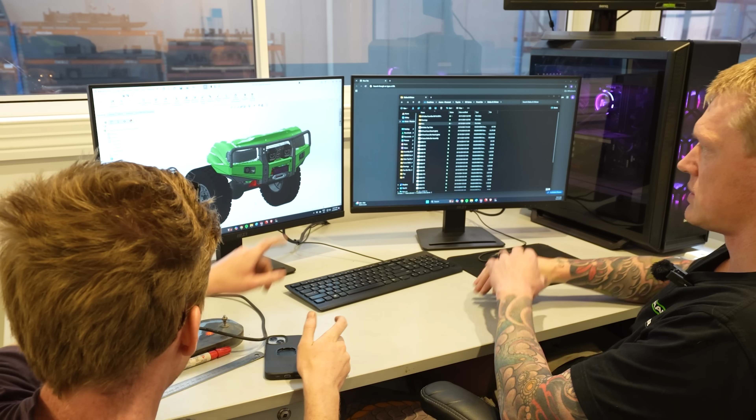The problem we face is currently the bull bar I want doesn't exist for this car, so we're gonna have to research, design, and build a bull bar from scratch. In order to make that happen, we've come down to see our mate Rob at Raslarr Engineering. You might remember he helped out with the barwork on Liam's patrol build, and he's gonna help make this a reality.

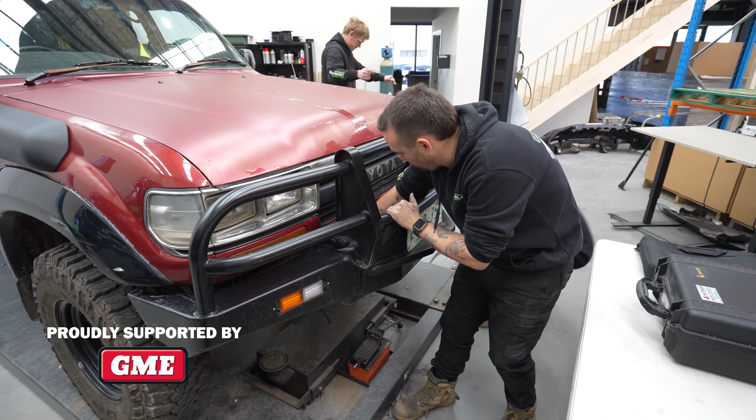Choosing the right barwork for this car was always going to be one of the biggest decisions. After the fresh paint job, it looks like it just rolled off the Toyota production line, but the barwork is where you get to make the 80 series uniquely yours.

I'm down here with Rob now, and we've got the 80 series on the hoist. Rob's been flicking me designs back and forth, and we've landed on something that's a bit more modern style, but also something that would suit a tourer like me, not like Liam where it's full comp style - a bit more tourer spec, a bit more for the older community, I guess you'd say.

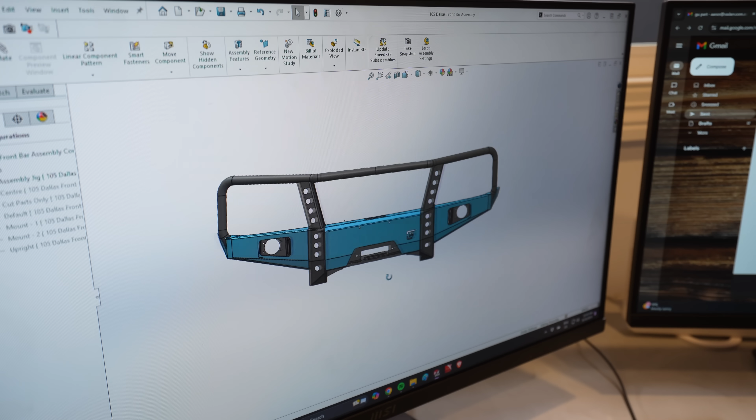More sheet metal, less tube, but still more of a tourer look, but still having hoops for protection, because obviously it's a bull bar first and all - you want it to be able to protect your car on the road against wildlife, other vehicles, the environment. So you sort of want to keep that practicality while giving it the modern look that I'm after.

So with a bull bar, I guess the first thing when it comes to designing, where do you start from - is this like on a piece of paper, literally just drawing down designs, or?

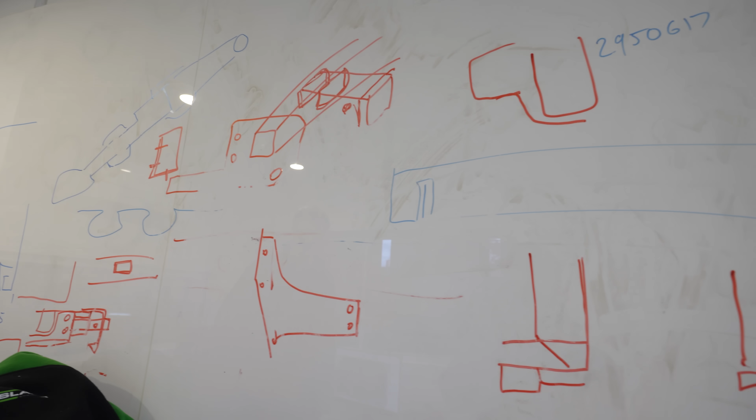Look, it's changed a lot over the last sort of 10, 15 years. Obviously in my early time, it was literally cardboard templates, cut something, try it on, hand drilling it. The world's changed so much in that time.

Now we have Aaron, who's our full-time CAD designer, so we can literally scan a car and come up with even just the actual look of the bar before you've spent days, if not weeks. You might make one and go, I don't like it - now in the computer you can see if you like it.

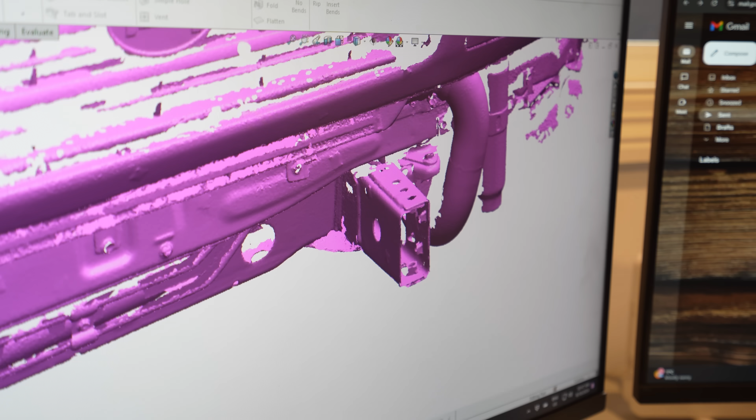Before you've even wasted all that time, you get the actual look down to what you want and suss out mounting and that sort of thing. Then, like we were talking about earlier, you've got to make a prototype and do a small production run, try them on multiple cars and try and learn all the variables.

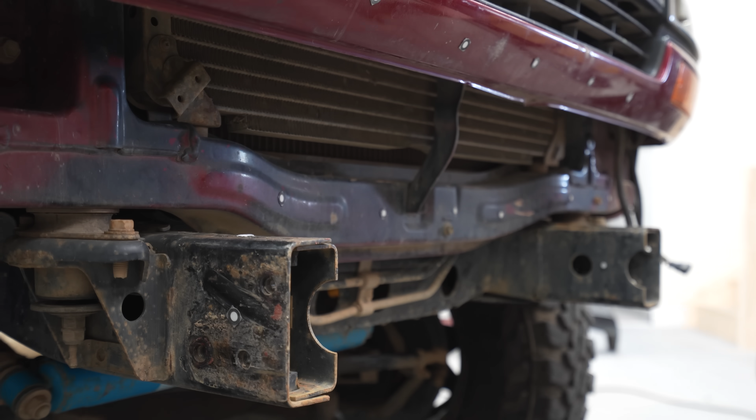Exactly, because these cars were built in Japan in the 90s, but there are tolerances - not every 80 is exactly the same in terms of exact measurements, and that's one thing that over time they haven't got better. It's not uncommon for the width of the rails to be sort of 6-8 mil different in width. Modern cars, like a new Patrol, it's common for the bodies to be 10 mil off to one side.

And I guess that leads into the exciting thing we get to do on my car - actually 3D scan it. That's using that fancy laser gun that's shooting stuff at it, getting reflections back off, and builds a 3D model of the car, which then you guys can put straight to the CAD and build your design off that, get all the measurements right, and then send it out to your boys to actually build.

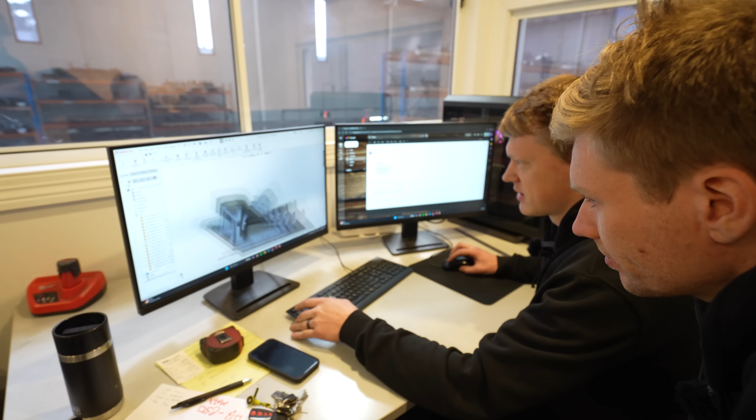I'm here with Aaron now. Aaron, how long have you been working at Raslarr for? Nearly 10 years. He's basically one of the main engineers here that designs all the bull bars, does all the 3D scanning and CAD work. It's really cool - he's the actual one who's designing the bull bar that's going on my car, so it's awesome to have him here to talk us through all the different stuff about it.

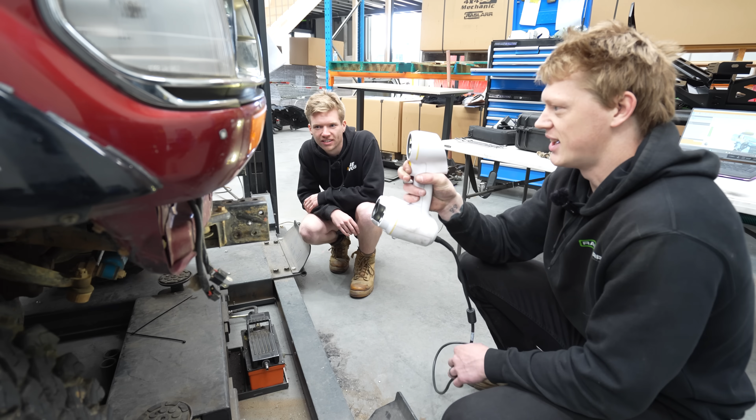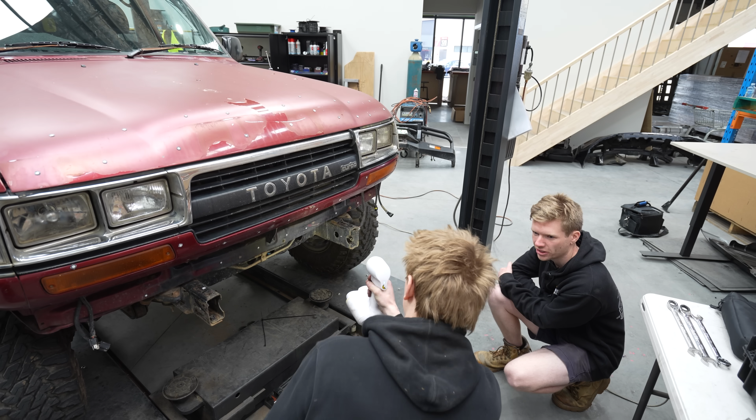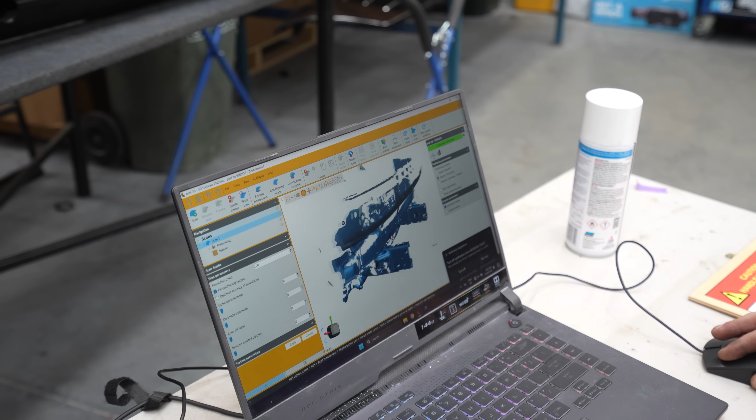So when you started here, did you do 3D scanning, or did you do it the old school way? When I started here, we didn't even have a scanner or anything like that, so everything was pretty much cardboard. This probably allows you to do more complex design work, since you can just stick it on the computer and put in random cuts and shapes. Yeah, 100%, takes all the guesswork out and all the hard labour, let's be honest. So in real time you can see it painting - pretty much, yeah, like discovering all the parts on it.

That is awesome, so you can see your bolt holes and you pretty much build off that. So the scanner hates shiny surfaces like this. Yeah, right, because it reflects light - that's how it works essentially. It's shooting out photons, getting the reflection, and measuring how fast it takes to get back to the camera, and then obviously measuring depth and all that.

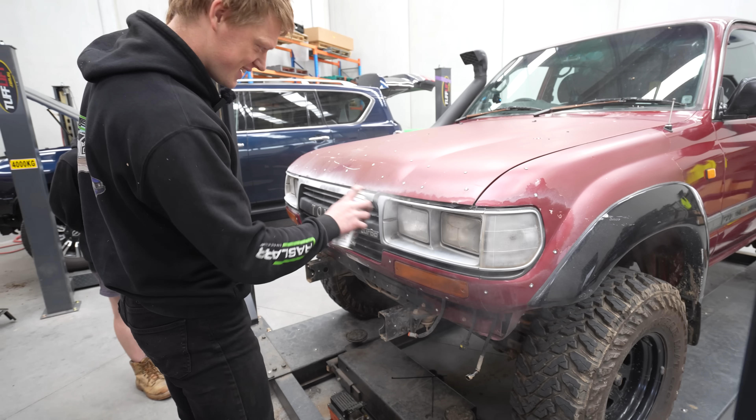So it doesn't like chrome and stuff? No, it doesn't like chrome. You usually have to spray it with this stuff. Oh okay, so we'll spray it on. Yep, and then we can actually do the grill. Oh well, cool, yeah alright awesome. Yeah so you spray this stuff on, give it a minute or two to basically set. Does it look alright? Yeah, it's looking good, it's all showing up real good.

Alright, so now the scan is done, we're going to go up to the office and actually work on the computer. This is probably where you spend a lot of your time actually finishing with the design, getting it perfect. But yeah, go and look at how it's done in CAD, and then we can actually see what this bar is going to start to look like. So let's get up there.

Now you showed me - I've been seeing designs that Rod's been sending me of it on a 105 series. Yep, you've got - so this is essentially what we're sort of going for. This is the early design of what the bull bar is going to look like.

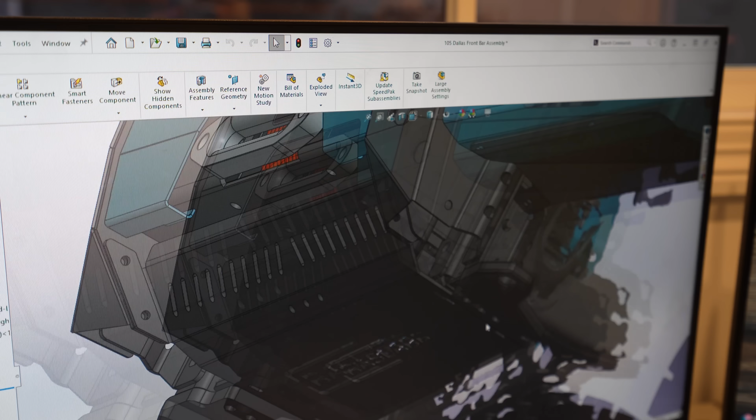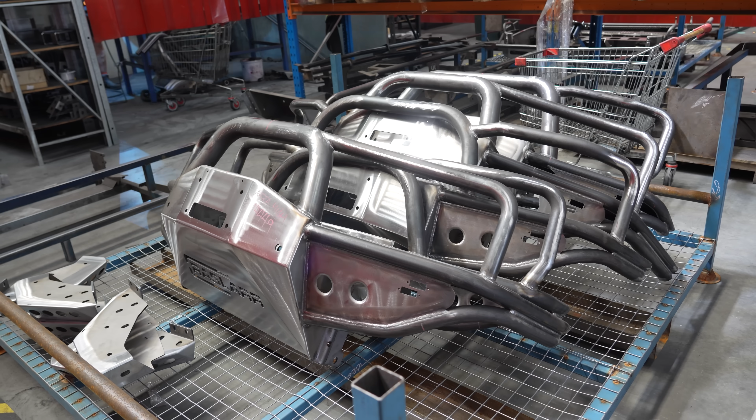So when we design the bull bar, what are the main considerations you're thinking about when designing it? So yeah, big ones would be mounting, strength-wise, ADR, all that sort of thing. And then stuff like winch access, recovery points, and then your lights - how they're all going to fit, how they all look. And then obviously overall style and look of the bar. You've always got to factor in the actual manufacturing, fitting of the bar, all of those types of things.

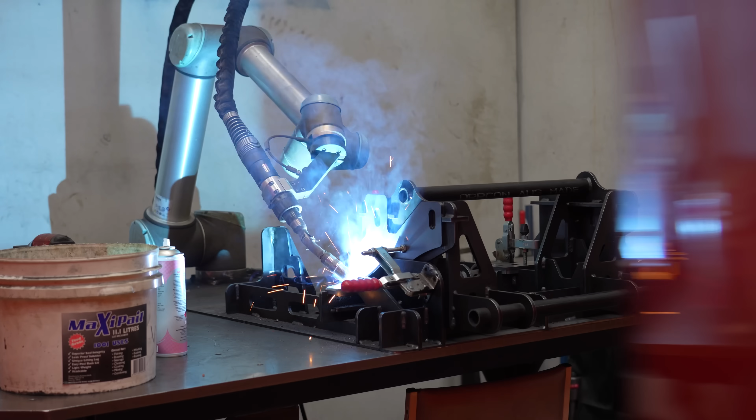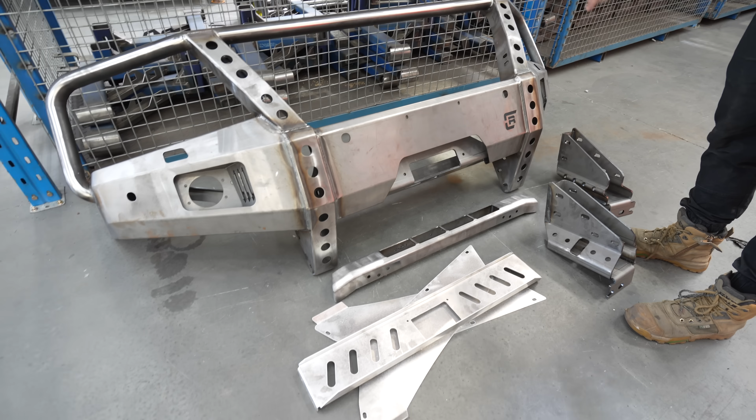And now that you're doing a lot of the manufacturing work, some of it's automated, like we saw down there - the robot grinders, robot welders. Do you factor in how they can help build the bar as well? Like you might design something and think, oh well... 100%, yeah. You've got to figure out how you're going to jig this part to make it robot welded or robot ground. Doing a front bar, doing a sample one, isn't easy, but getting it into production is literally a million times harder.

Alright, so now that we've got our scan all complete, we know what we want the bar to look like. Now Aaron's got to sit here and lock himself in the room and design it, and then we'll come back when it's time to actually fabricate this bar. Because essentially from the CAD, you can then export the data you need to send to your various machines, like the laser cutter or the tube bender or whatever, and then from there it's pretty much just manufacturing and then assembly, right? That's it, mate. Alright, well I'll let you design it and then we'll come back and get it all fabricated.

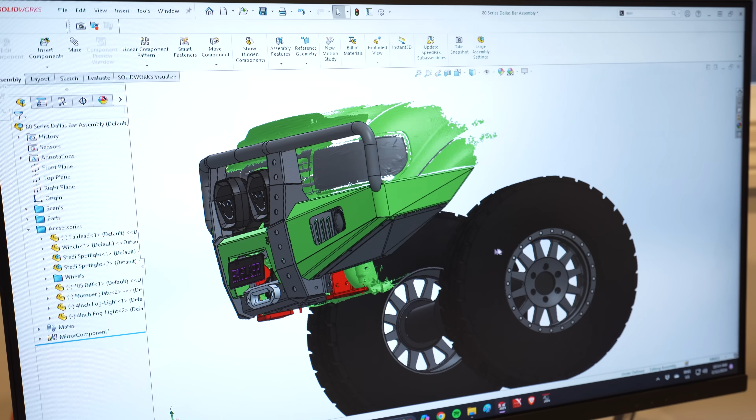Alright, so it's been a few weeks and Aaron's been working hard on the CAD design for the 80 series bull bar, and this is what he's come up with. So it looks absolutely awesome. I'm really happy with how it's turned out. It looks grouse. One thing we're tossing up is whether to finish it in front of the flare, or literally we're going to have to cut your flare.

Yeah okay, yeah, so that's... are we cutting the flare? Yeah, we'll cut it. Alright okay, like that's the thing with 80s these days - people don't really care about that sort of thing, they're happy to cut stuff up to make it look better.

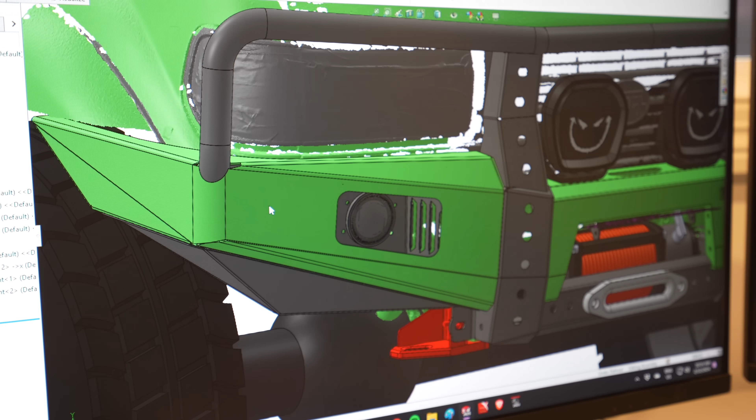Yeah, with the whole thing of the 80 series, we're trying to cover that indicator. Yeah, indicator and body there. So with most other bull bars for the 80, they have to hang really low because they want to keep that indicator showing, but it sort of makes the whole front of the car seem low. So with that look, it'll look pretty aggressive on the car. Yeah, it'll look pretty sick.

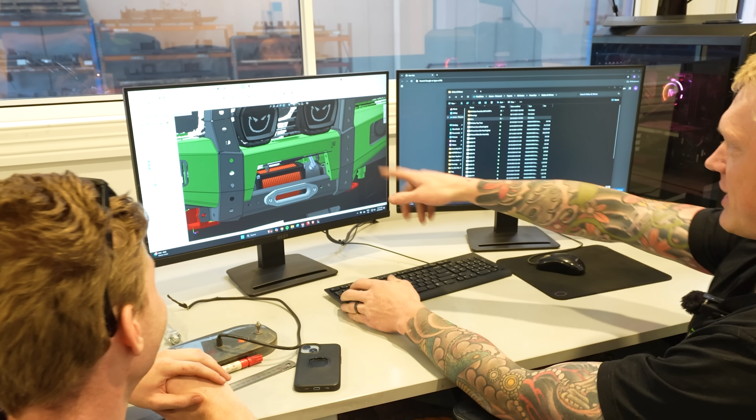So are they indicators or are they... so yeah, they're fog light and indicators. And for the winch and stuff, you've got the winch cradle in under there. Yep, so we've made a fold-up number plate so you can still access the... oh, get to the clutch. Yeah, awesome, clutch, yeah sick. And then it should fit any low mount winch.

Yep, and then recovery points on the front, pull little bash plates, and then that's it. That's gonna look grouse.

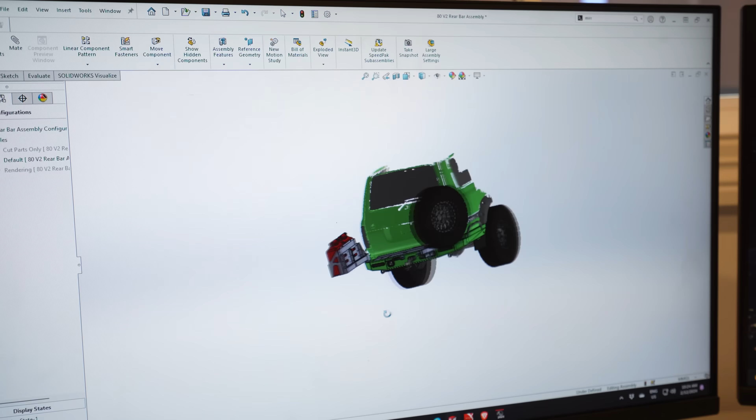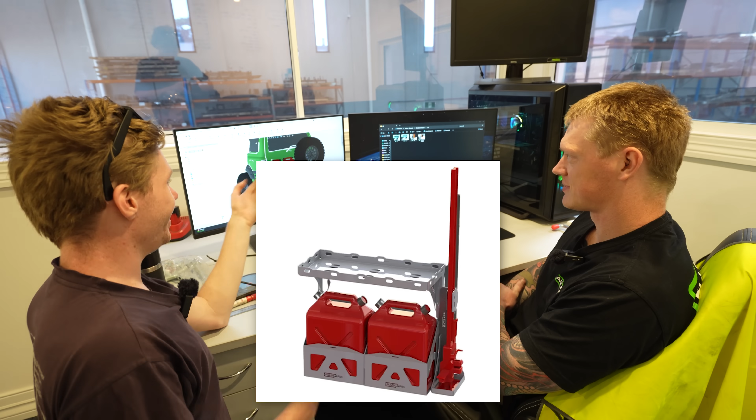All right, so as well as the front bull bar, we're actually gonna be putting on a new rear bar on the 80 series. Aaron's been hard at work developing this, V2 of the 80 series rear bar. You guys always made rear bars for the 80s, but this is their new one, and the styling looks so good. There's a heap of new features like the integrated tow bar. Obviously you can put a bunch of different carries on there, you've got Maxtrax mounts, jerry cans, and I think a drop-down table on some versions as well.

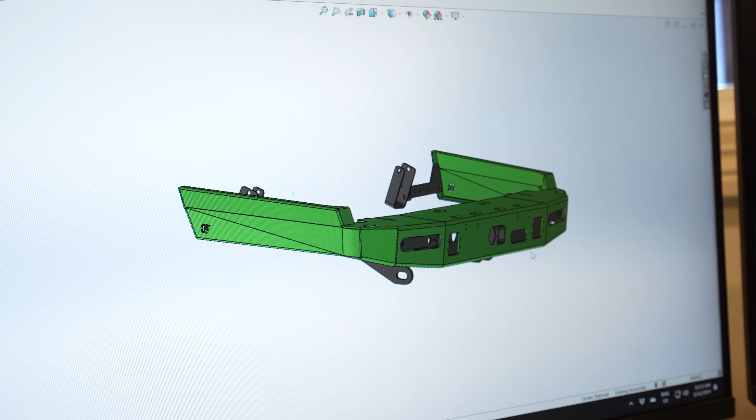Yeah, some of the design work, was that fairly simple to put together? Yeah, so we've basically developed a new type of tow bar, which is a bit tricky to get around, but apart from that, pretty straightforward. Because the hardest thing on the 80 series is if you want to put a tow bar on, it has to hang below the chassis essentially. That's what was on my old 80 series before, and when you're off-road driving it's always getting hung up everywhere. It's a massive pain. So the fact that you guys have integrated it into the actual bar itself means you get that clearance while still retaining the factory chassis and keeping it all strong and compliant, which is the main thing.

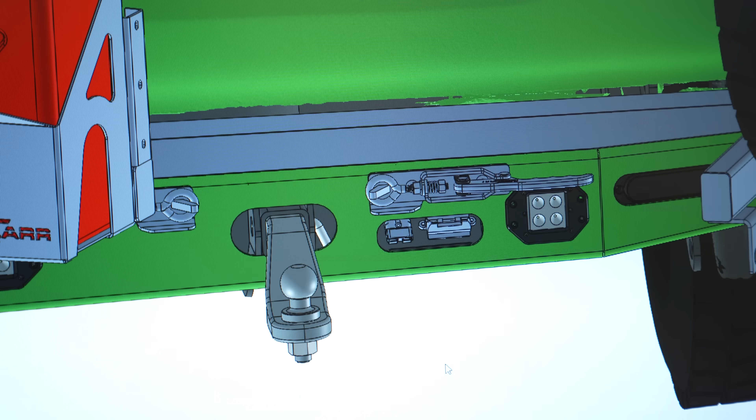So another cool thing on the tow bar is we've made this little mount for your trailer plug and stuff. Oh, that's sick. Normally they literally screw to the bottom of your tow bar and get smashed, they look kind of tacky and just get smashed off and covered in filth. That's awesome, it's gonna look so good once it's got all that set up on. So this is another thing the boys are gonna tack up, get all bent up, and we'll get that on the car as well. Heaps of work to do, but all the CAD stuff's done now, which is a huge task off. So good work, Aaron. Now let's start putting this whole thing together.

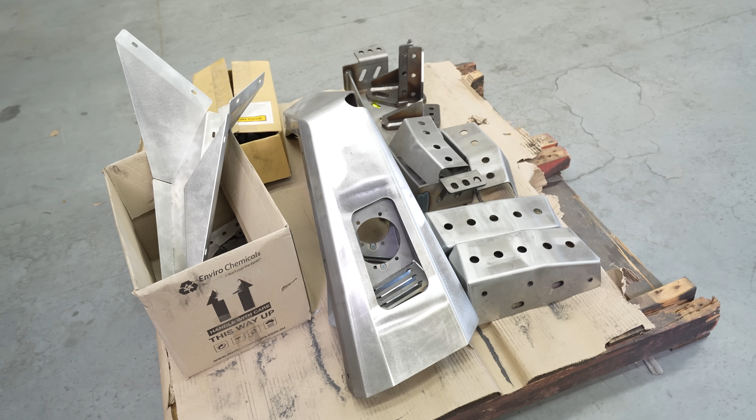All right, so we're back down here with Rastla and we're with Rob now, and we've got all the pieces for the bull bar in front of us. Now it's a bit of a process putting this front bar together because we're using sheet metal, obviously it's not a tube bar. So I guess just run us through a bit about all these bits we've got to put together.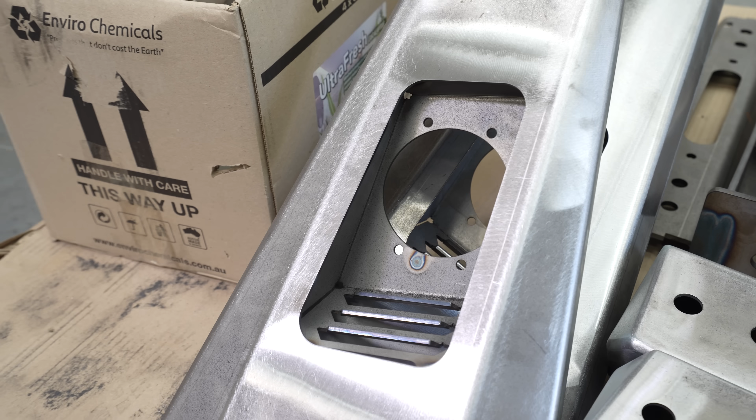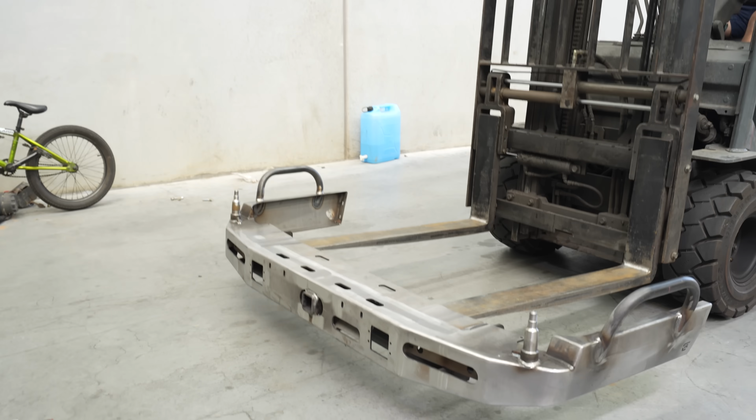So we've got our wing assemblies with the fog light housings already in them, our recovery points, obviously winch cradle, uprights, all these bits. So it's easy to get them to a sub-assembly like this where they're all welded and cleaned up. This is as far as we can go without having the jig. So unlike the rear bar where essentially that all tabs together and the only jig we need is for the width of the wings, so that's very quick to jig up, this is quite an in-depth jig.

So what we normally do is the first one, we'll actually physically make it, old school. Then when we're happy with that, Aaron will normally scan the finished bar and then we can jig off that. Yeah, and to see how you've made it and how it sits on the car is like... Exactly, 'cause it's one thing going from a computer, but then it's another thing building it in real life and actually test fitting it to the car for the first time. So obviously we've got to make sure once it's on the car, we're happy with how all the alignments are and all the gaps and everything.

And then once we're happy with that, that'll end up being the version you guys mass produce. 100%. So at this stage, if you went 'oh I really wish that was 10 mil smaller', we can trim it or bring an angle in, or whatever. And sometimes we'll tack them up and pull them apart 2 or 3 times. Then we go, right, we're happy with that, and then we go into production.

All right, sweet. So we'll get this all welded up, the lower section, and then once we get that all fit up on the car, then we can start working out our tube work at the top, and then we'll pretty much have a bar. So yeah, this one will be super exciting, it's our first, so we can go straight from CAD to our CNC bender, straight off the computer.

So I'm pretty keen, it's gonna be really cool. All right, cool, let's get into it.

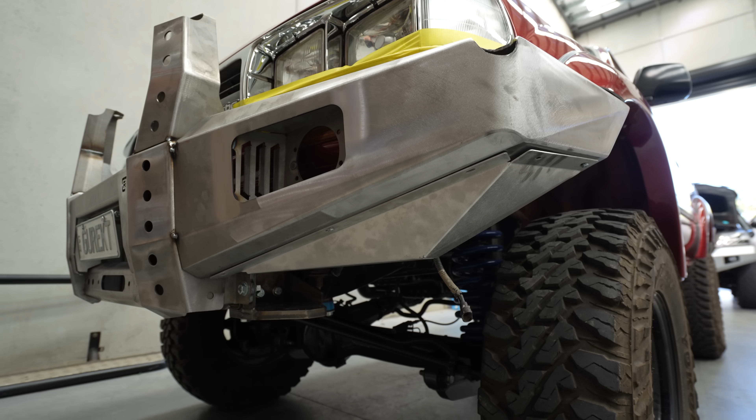So we left Rob to piece together the front bar and came back the next day to see how it all went. Everything looks a bit different when it's in raw, I find it hard to get your head around. Because the under trays, when they're black, they just disappear. But when you see them like this, every time we build one, I get a bit nervous. But yeah, I know it'll all come together. You did a good job, it looks freaking perfect.

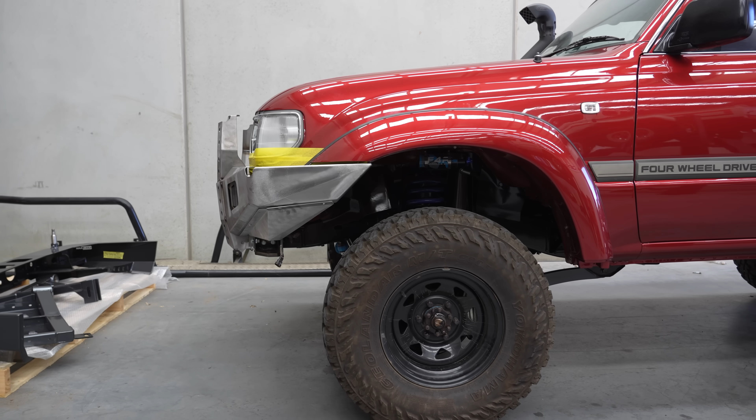This is just a rough cut, I just wanted to get them together to be able to see it all. But all the gaps and everything are really, really good. I'm pretty excited to paint it. Oh it looks so good. It's pretty cool, didn't have to touch or adjust it. So the CAD all went pretty well, it's so cool, oh it's gonna look so good, Rob.

Yeah, let's go do a top tube. Yeah, exactly, let's do it.

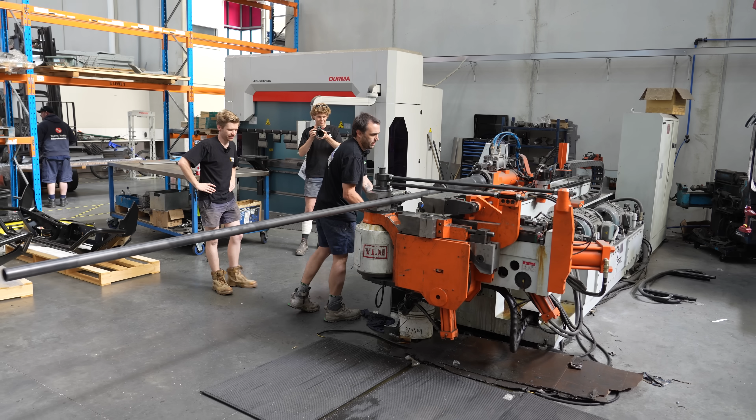All right, so now the bar construction has started, we're gonna actually do the bending for the top tube. This is Rob's really fancy tube bender, it's computerized and it's amazing. Rob, tell us a bit about it, because every time I see it, I'm mind blown.

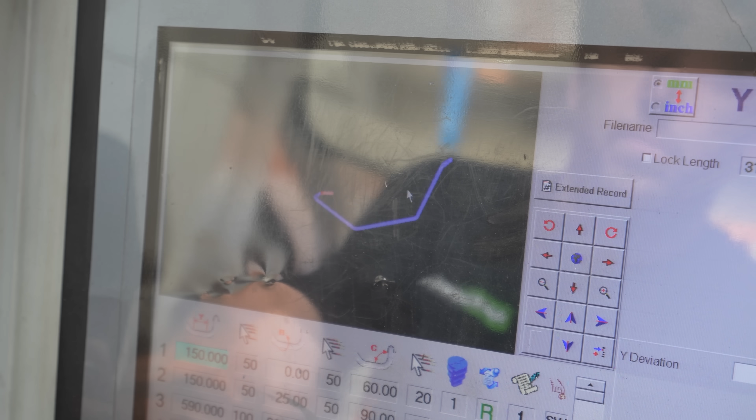This will be the first one where we actually can import the file from CAD. Normally I just have measurements and I've got to work it out. So basically that'll be your top tube, you've got all your centre dimensions in your table here. This is where you would program it, you can rotate it round, you can change your angles, so you get rotation, the bend, and the gaps between the bend.

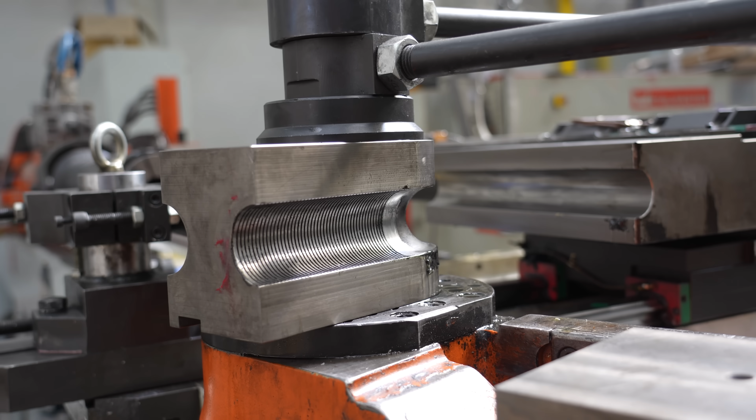This one's a bit interesting because it's such a compact little bar, we've actually got to get full new tooling made specifically for this car. Very cool, so this one's a very unique bar and going to be an expensive one to make. But the beauty of this is once you're set up and it's done, we can literally print off 50, you can smash them out like that. This can literally take a straight bit of tube bar and create that just with its automation and bending.

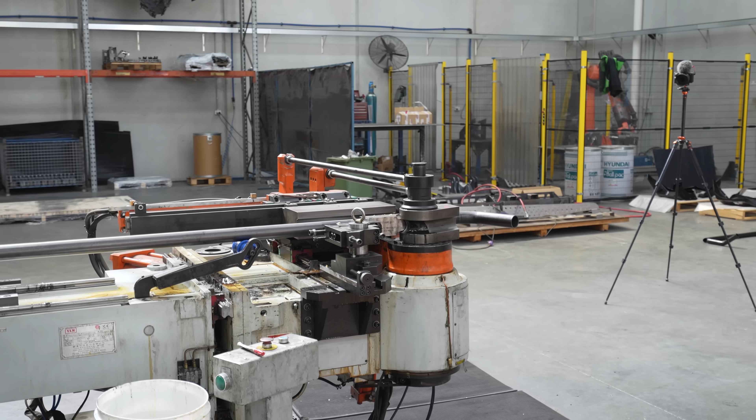All right, we're going to bend some tube, this is going to be cool. All right, press the big button. So technically this is running at 8% speed. Look how effortlessly it just bends it.

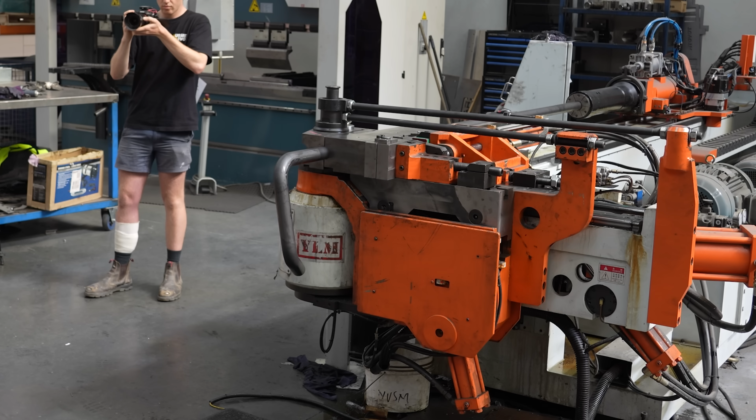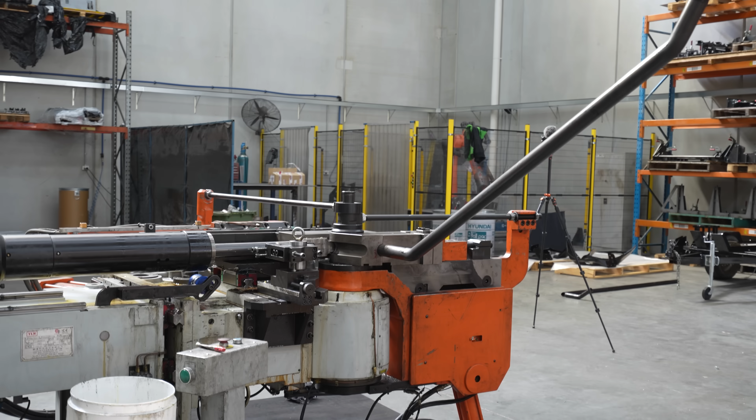That's the thing, getting this repeatable precision, especially when you have to rotate it, like trying to do this in a traditional bender and doing 50 of them in a minute would be impossible. So you'll want to move right back there now, there it goes, and then it's going to drop down that last little bit. So now it'll let that go, you'll do the last bend, see, pull the mandrel out, it'll come away. And there we have it. I love how it just took us like 30 seconds to bend that and it's on the car, and then it becomes a bull bar.

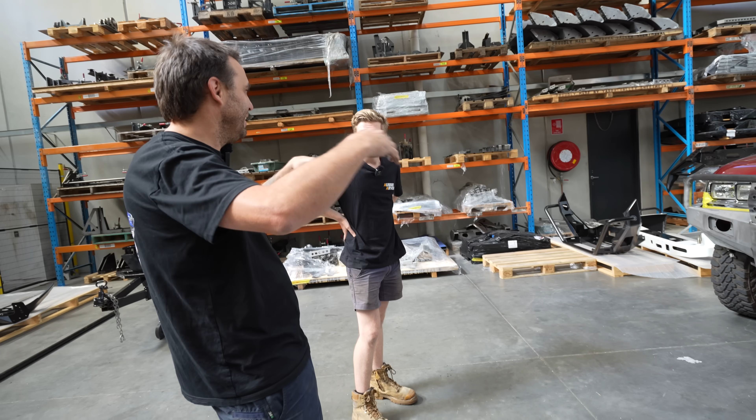Oh it looks so good, that's pretty wild, that program is just off the computer. That normally takes me like half a day and then like 4 samples to get to that work right, and now you can just do it through CAD. That one is number one. That's so cool, because with these it's a full length of tube, so if you do a few trials, it's a lot of tube you go through. Exactly right, and you consider that was just first go, that's number one, which is cool as.

So now we just need to pull it all apart and weld her up. Yours painted is going to look like on another level. Really keen, I'm so excited, Rob. Oh, it's going to be awesome.

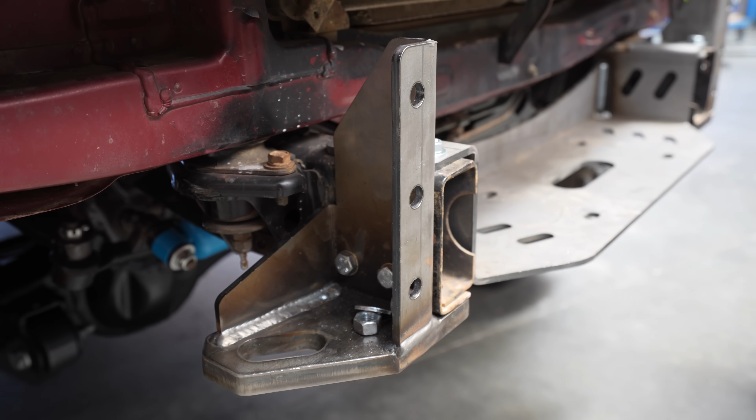So Aaron's seen it in person for the first time. What do you reckon, turned out all right? Does it match the drawings? Yeah, it's pretty much bang on, eh. A cool, interesting design factor on the new bar is actually how it mounts to the car. You'll see here it's got a cradle in here, this is where the recovery points go to and where the actual bar itself mounts to.

So why did you decide to go this way, Rob, around designing the bar like this? Well, the biggest thing is Aaron's always trying to build in more adjustment, especially with these old cars, they vary an awful lot. So this has got up and down, in, out, side to side. You can nip it up to suit your car.

So on this sort of setup, the GU's the same. You can put your winch in, fully wire it. One of my pet hates, and we've talked about with Aaron a lot, is most recovery points are never tested in side shear, they're only tested straight. So when they're vertical, they're obviously exceptional this way, but when you winch sideways, it's a lot of load through a couple of bolt holes. At least this way you're fixing it to two surfaces.

All right, so the next stage you're going to be actually welding this up, so we can move through the process, get it ready for painting, etc. This bar you're going to hand weld, obviously, because of the prototype. Yep, so this one will be all hand welded. As we move forward, we try and sub-assemble everything, so all the uprights, when we do volume, we'll get robot welded and robot ground. The recovery points and all that, whereas the rear bar, pretty much the whole rear bar, like putting the wings on, can be robot welded.

Yeah, because I remember we visited you guys last year with Liam's patrol when we did the full bar for his car, you just got in the robot welders. Yeah, you started using them. And now you guys use them for a heap of different stuff. Like I just saw there's one over there doing recovery points. I love it for tow bars, recovery points, all those really critical things where you know the repeatability of it.

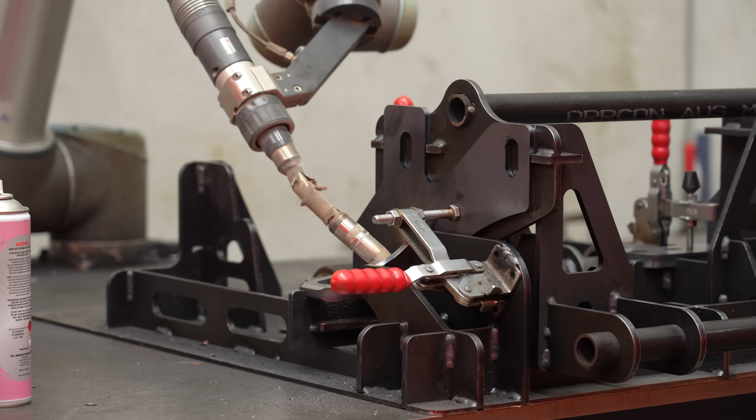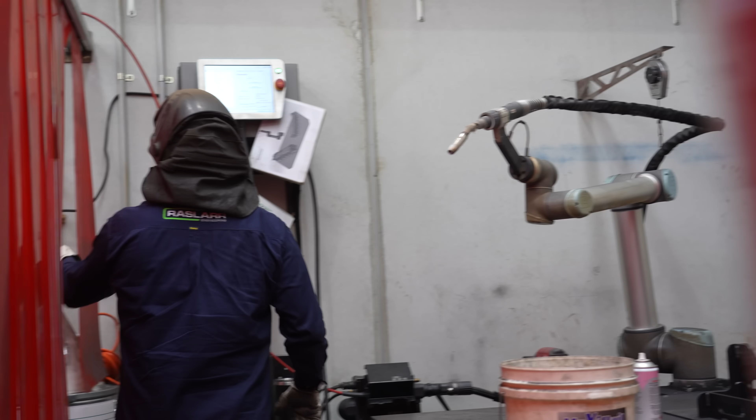There's some things obviously a human has to do, and look, a human still has to operate a robot. People get caught up in the, it's replacing a human. It takes a more skilled human to run the robot than to run a welder, but the beauty of it is the consistency, especially on safety things like a recovery point. Knowing that every one leaving is the same as the last, and you're not having Friday Arvo welds with a bit all over the place - I've got a hangover, that's it.

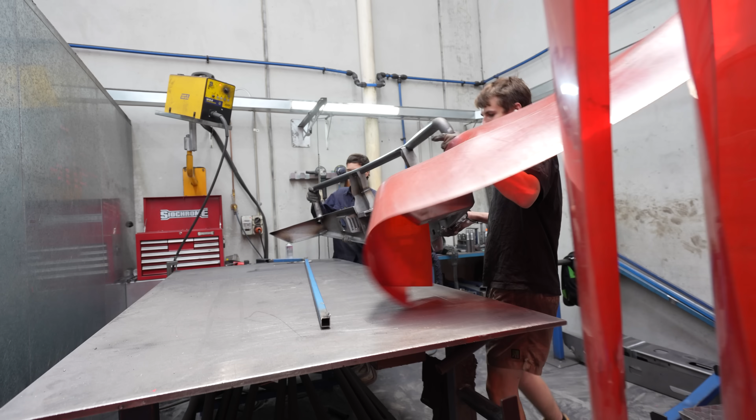So Rob's gonna get stuck into laying down some tacks on that new tube, and then pretty much go around, weld up the rest of the bar, and get this thing all ready. So the boys got stuck into welding up the bull bar and the rear bar so it would all be ready to sandblast, powder coat and paint.

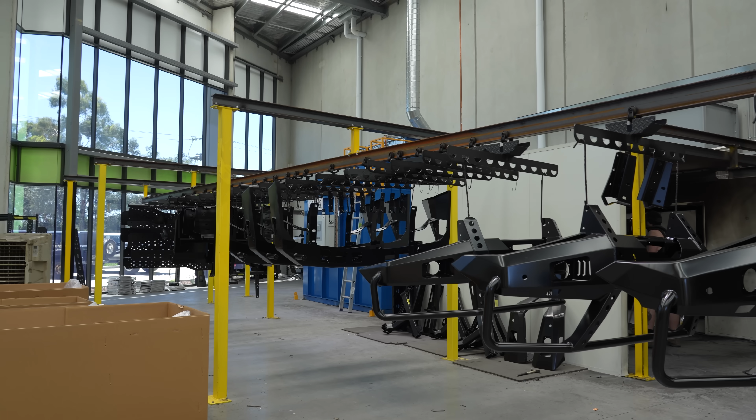All right, so now the bar's all welded up, it's time to actually sandblast it and start thinking about painting. Now, since the last time we were here, a lot's changed. The setup looks massive. Do you want to give me a bit of a rundown on how this whole thing's gonna work?

Yep, so any small parts will go in the shot blaster. Large parts will go in the sandblaster, get garnet blasted. Then we're going to get them hung, so we've got 2 ovens now, so the priming and black process doesn't have to stop, it just continues through. First booth it'll get primed, which is like a zinc powder coat primer. Then into the second one it'll get hot coated black, into the last oven, and out we go.

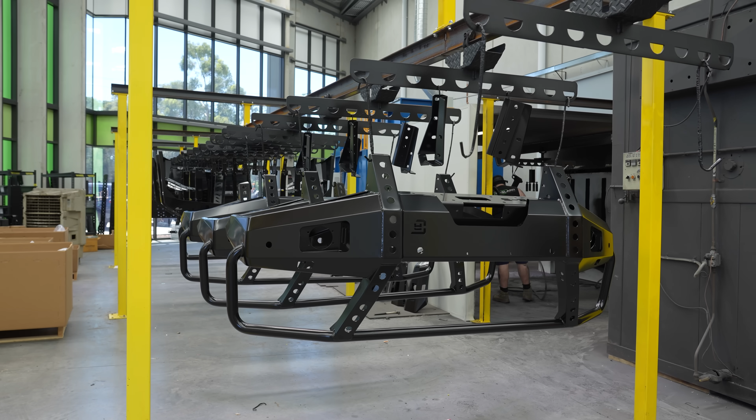And then you also go up to Mick. Mick will paint them, sliders and everything will be finished and straight onto the hoist. And now, because we're doing a colour match bar on the 80 series for both the bull bar and the rear bar, there's a bit of a process to colour matching, isn't there, Rob?

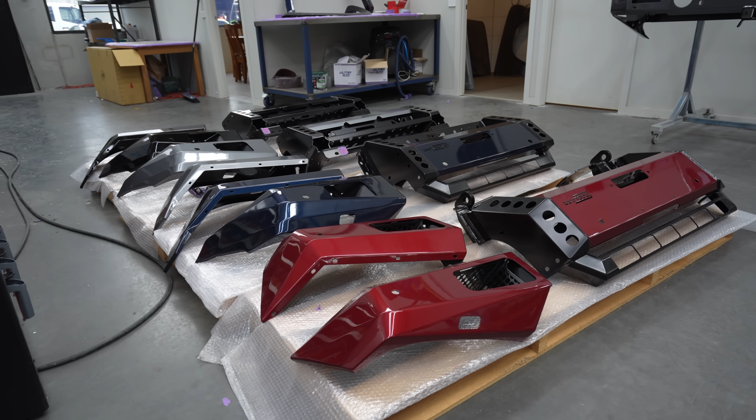Yep, so there's 2 aspects to that. The colour match - most people don't realise there's a lot of variance in colours on cars. Like a new Patrol has 14 variants of white in the same colour code, just as an example. Right, but another misconception is everyone thinks the bars are painted. They're actually all black - doesn't matter if it's an ARB, doesn't matter what brand, they're all black. And then the colour coating is essentially just a looks part of it.

So obviously they come up powder coated black from our line. And then there's a tremendous amount of prep so we don't have overspray and stuff all on the inside, so just the bits we want to paint. Pretty in-depth - Mick will mask it all and actually sand it all, and then go around and fine line all the edges to crisp them up.

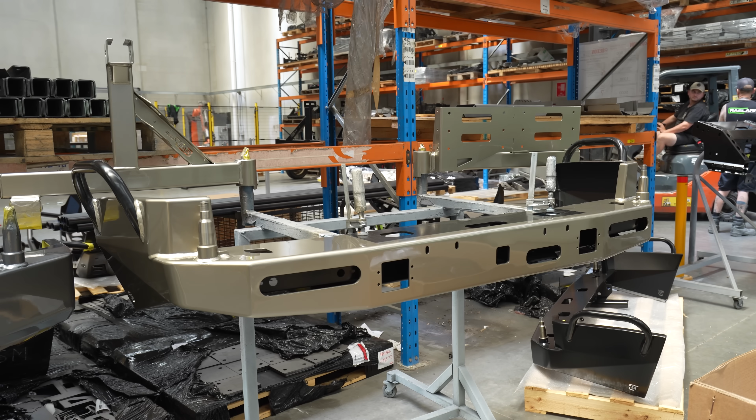So you can see there's fine line tape with multiple levels to get that edge really perfect. It's very challenging to get that all right. There's a fair amount of work that goes into colour coding, but I do think it looks awesome. It takes it to another level. I absolutely think it's the coolest thing, and it gives the bar another dimension.

You really see that bit through the middle. Now on my 80 Series, we're lucky enough to have leftover paint from when we actually painted the car, so we're going to be able to use the exact same paint we used on the bar work, so it's all going to match in perfectly. We're also going to be using scratch resistant clear coat, the same one we used on the car, on the bar work as well. So it should turn out really good.

Once it's all got colour, it's going to come alive, and I can't wait to see it. All right, so before we go pick up the 80 Series with its new bar work, there's one last thing we got to do, and that's wheels and tyres. So I've come down here to see Nathan at Treadworx Lilydale. The wheel and tyre package we're going with is pretty wild. We didn't want to just stick with the normal steel rim for the build we've done. It's turning out the car's been way more than I ever could have expected. So we'll go inside, I'll show you what we got sorted with Nathan, because it is pretty wild.

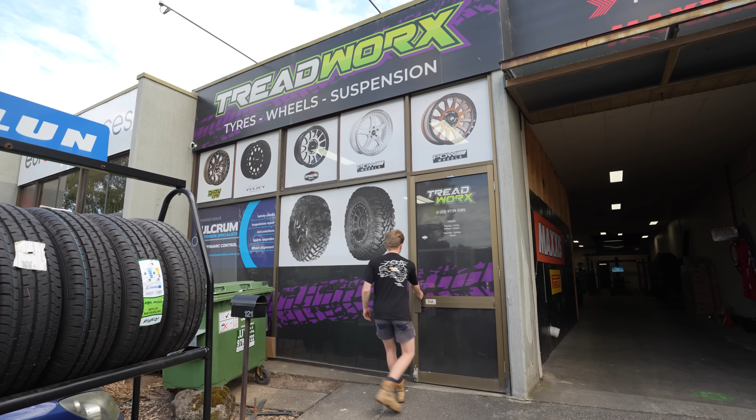Oh god, I'll put a cap on it. This is gonna look wild. I've always been like just basic steel wheels, and this is the complete opposite of basic steelies. Oh, that looks good, that looks flash. Love a bit of dad chrome. Big and shiny, big and shiny. Yeah, so chrome gets you home.

All right, so when it was time to decide wheels and tyres, I came straight to Nathan, because Nathan obviously does tyres, but he also does wheels as well. So it was awesome to go through them and talk about what makes the rim different, why would I go this way over that way. So I knew I wanted something a bit more flashy on the 80, didn't want to put just a standard steel wheel on there. And we've gone for an alloy rim.

Now there's a few benefits of running alloy, isn't there? Yeah, well particularly with this one, it is a higher load than your standard steely. Typically your average steel Sunraysia wheel is going to be about 1,250 kilos maximum load. A lot of the ROH stuff now is upped to sort of 1,500 kilos for your GVM upgrades and compliancy and all that sort of stuff. And surprisingly enough, although the 80s and GQ, GU fitment is a very common vehicle, a lot of the wheel manufacturers' more modern style wheels are actually limited to dual cab fitments and offsets and stuff.

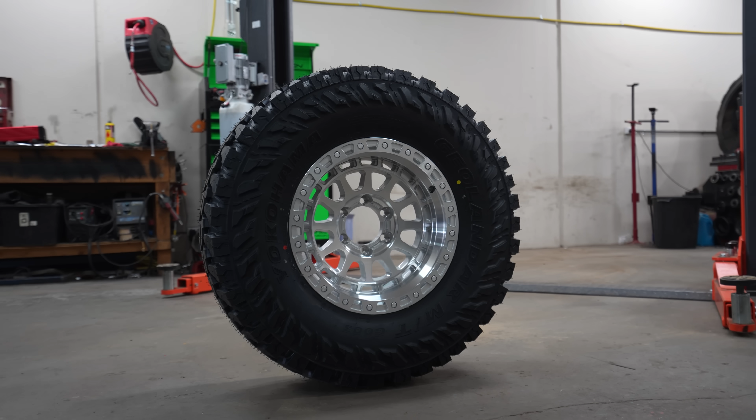So when you wanted to go something machined, the ROH is a good quality wheel, machined, looks awesome, it's sort of a go-to. These are available in a 17x9, either neg 12 or neg 22, so that style of fitment is perfect for your vehicle. This one's a neg 12 in a 17x9. That was exactly what we were trying to do, to match the flares and not have crazy poke or anything. So it was good we were able to get a rim with the correct offset we needed, and it is slightly wider than my old steel wheels.

Well, that's it too, yeah. So basically, being a 9 inch, it'll accept the true 35x12.5 tyre a little bit nicer and not be so bulgy. And I guess that's the next thing - we've gone for a 35-inch tyre, which is a big step up obviously from having the 285s on there, which I had before. The main reason for going bigger was clearance.

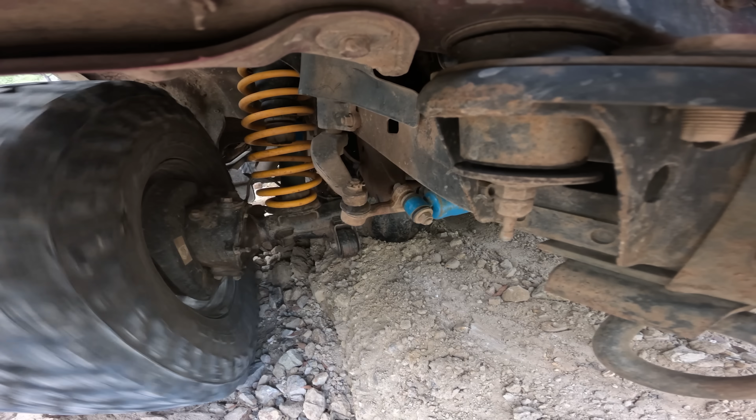Obviously the diffs and stuff were getting hung up heaps when we went four-wheel driving, especially when we're trying to keep up with all the other bigger cars out there. So having this is definitely going to give me that clearance, and not to mention, I think now with the lift as well, it will help suit the overall look of the car a bit better. We've got a Yokohama Geolandar G003, so the same mud tyre I ran on the car previously, and these were awesome.

When we were off-road last year, the way they eject mud is, I think, beyond any other mud tyre I've used. So they've been really good for that. They don't get turned to slicks like other tyres do. And the grip you get from the Yokohamas is just insane. Pulling a 3.5 ton vehicle up a steep, shaly rock track, I never had an issue with them losing traction. Even off the beaten path, through thick scrub, climbing over logs, I never had a puncture, never had the bead come off. They were just a very dependable tyre, and that's what you want when you're out in the bush.

Not to mention how it drives on the road has been really good as well. We drove all the way to Queensland on the highway, and to be able to go straight from a highway to a complete mud track has been really good, and they wore really well. So that's exactly what I've chosen for the 35s now. It's going to be really cool to see how the car looks with this on, I think it's going to complete the look of the car.

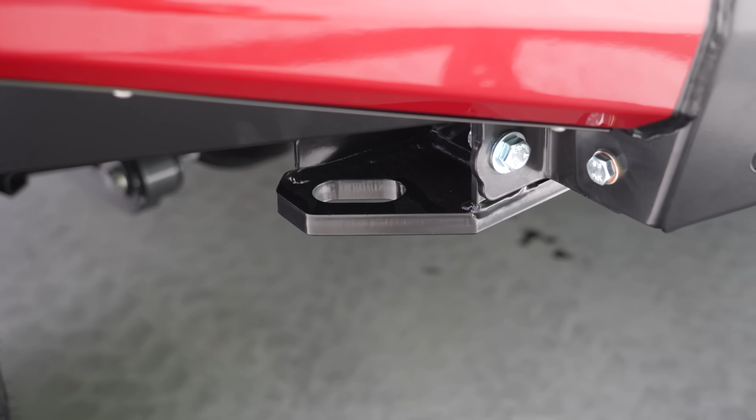But also wanted it super snug, like super aggressive, but a lot of people like yourself, you're not a big tube bar person, so this gives you exactly that, and it looks really good, recovery points, and it turned out looking really nice. No, but it looks so good from the front. It's really changed the whole look of the car, and I love it.

I guess moving around the side, brush bars. We've finally put brush bars on the 80 series, so that's an awesome feature. I reckon they mesh in really well with the red flares. And it's all super snug.

You having the wide flare, obviously. Yeah, and these being an aftermarket flare, I think they might even be a little bit juicier again than the normal one, because they're super snug, which is cool.

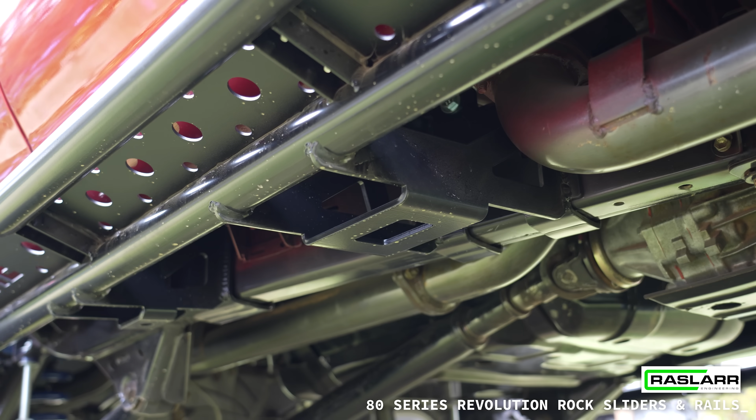Yeah, these are our new Revolution slider. So removable top, so we always say you can customize them. So on yours, we've got your logo in it. Yep, massive center foot, they're a folded sheet metal foot. And then the front's got a bolt-in one. We do multiple different fronts.

So we're talking about all the different exhausts that 80's come out with the other day. It is pretty cool having the old Aussie Arvos logo in there. I have to say, it's kind of just, you know, a once in a lifetime sort of build. So when Rob's like, oh, we can put a logo in there, I'm like, all right, you have to do it. It just looks really subtle, cool, but it's subtle, but it's good. It's just a little cool thing.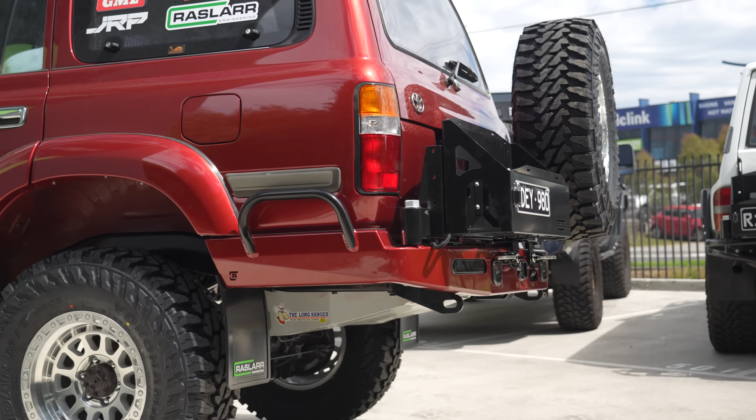So, rear bar. Rear bar. This is what I was so excited to see, the rear bar. So yeah, big wing brace, super skinny wing. The whole bar's up if you get it from side on. Oh yeah, the clearance is flush with the rail.

Obviously there's a lot of controversy over the back of these cars and some people cut them and all that. And if you're that sort of hardcore, I guess that's a great option if that suits you. We wanted to try to do something that anyone can put on. It's legal, you don't have to do engineering or anything.

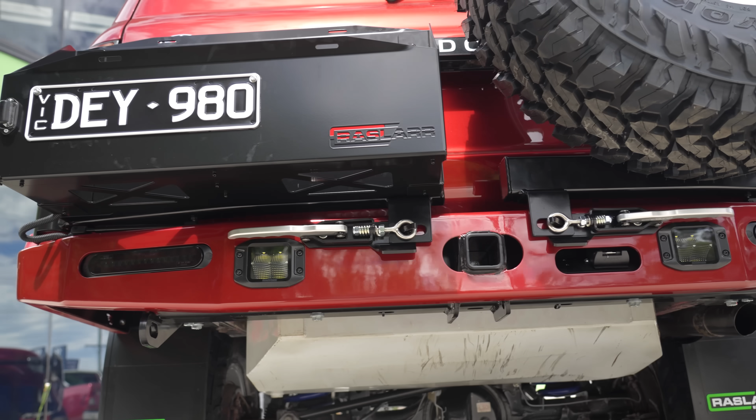So like I said, there's multiple options on the market. I've tried to go as aggressive as we can without modifying the car, because like all of them, your tow, fuel tanks and all that still bolt to a lot of those. Exactly right, so it uses all. It didn't want to have to remount all those things.

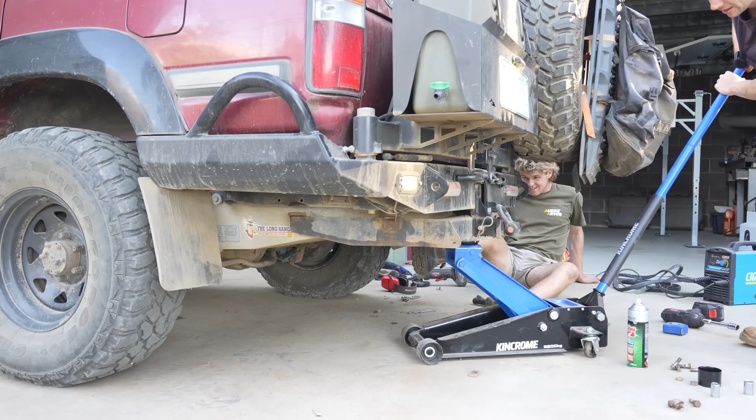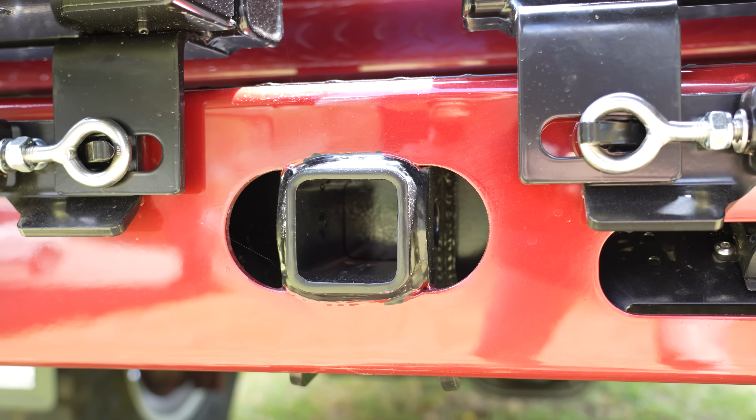So obviously the tow bar, you'd taken it off because you used to bottom it out. So tow bar's gone from being underneath to it's two folded sections, like an 8 and a 10 mil combo, and the main body's 6 mil. And they're all folded, so you've got an L around the rail, and then the whole bar's obviously a 6 mil folded C, and then it's got big plates in between it that laminate it all together. This one is only like, I think it's 25 or 28 mil further back than what our normal bar was. So it's definitely further back, but it's not as much as what everyone thinks.

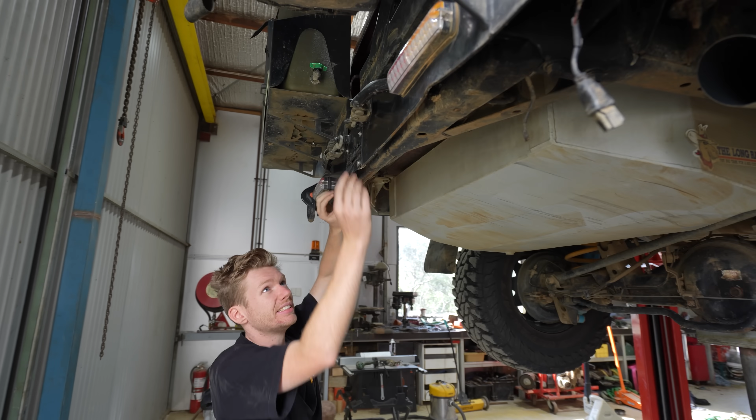What we tried to do with this - because I know how easy it is, from one of the trips I've done recently, for people to just skull drag the cars over rock - we've got a really big 6 mil fold on the bottom so you've got something flat to drag along and it can't catch and peel. That's exactly what was happening in my old bar. So it's just another option. We'll still keep our other one, because if you do a lot of towing, having the one underneath with less drop is probably the better option if you're not full hardcore.

Exactly, it's just having an option for everyone. I don't tow, I've never towed before, but it's cool knowing it's there - if I need to get a trailer from A to B, I can do it. You'll just take your motorbike trailer up the bush and all that. This is aimed at people who go up the bush a lot and want the optimum clearance, but still want that option.

Yeah, if you look from a distance, your fuel tank sticks out a bit more now - that's the last point. But that extra little bit of distance out is a small price to pay for gaining this much underneath.

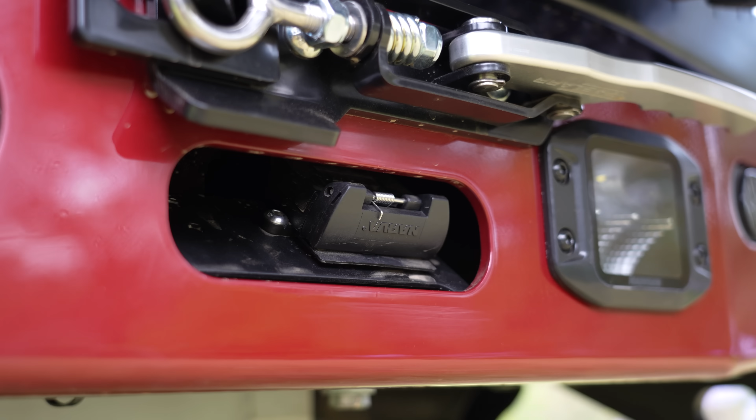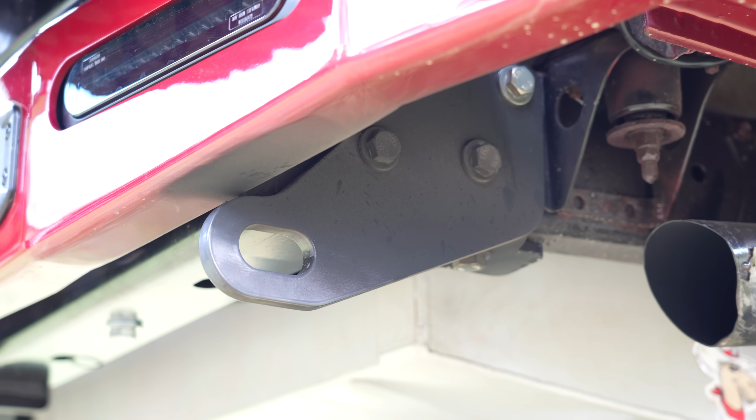But yeah, I love these. So it's got a spot for an Anderson plug - can't damage them, but super easy access. They've also got our new cool lights, which are all tinted. I love them, they look sick. These are also the recovery point or a bolt-on thing, so if you don't want them there and just want to use the recovery hitch, you can.

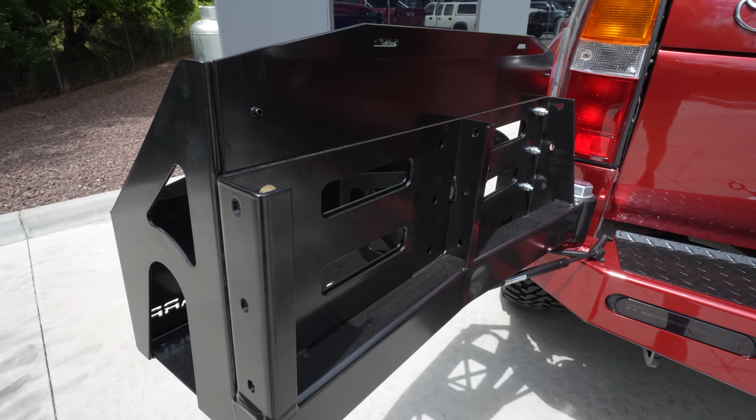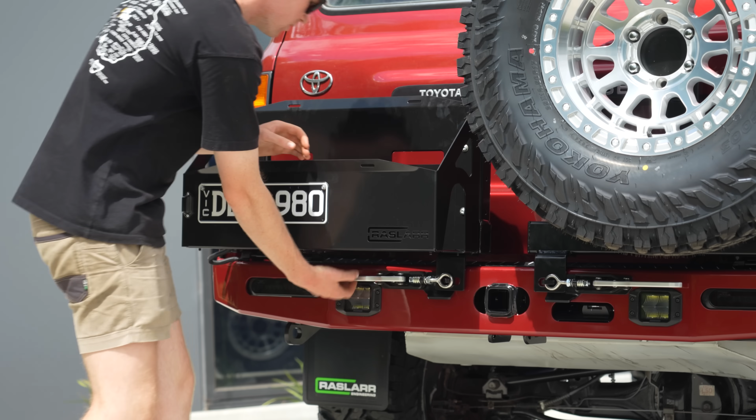So yeah, it's all on struts, modular carrier - 10 options you can put on here. We've got ladders, gas bottle holders, a little shelf, even a shelf that goes up here which most people don't know about, and our water tank, which bolts in between. So it's got a million things, and you can chop and change it.

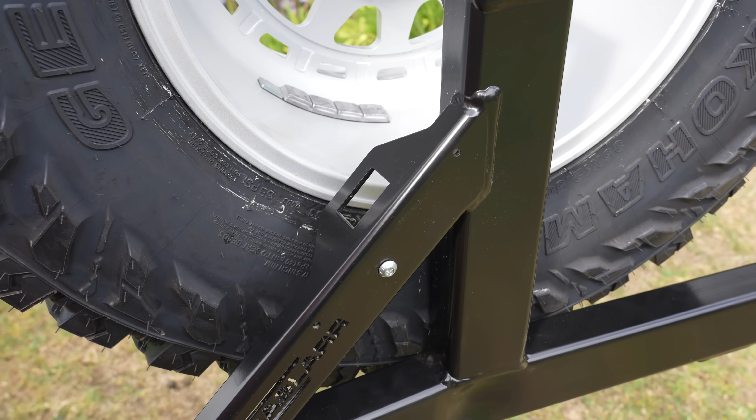Stoppers and everything are an integrated part of the hub, so you can't see the contact point and it stays neat - super clean. It's all got the light pole bit built in, option for a light pole. And we were talking about this being adjustable, so with any wheel offset you can keep the tyre in from the side of the car, even with a big tyre.

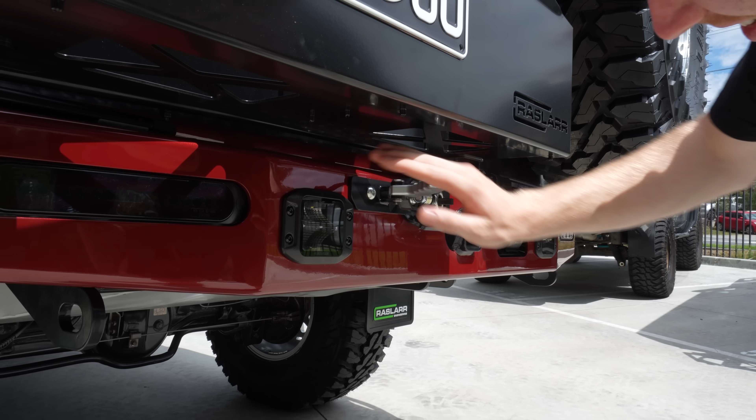But then when you're on twin wheels, we have offset ones, so you can offset it out to be able to fit two. Even though this is a 35, if you look down the side, we're still in. Yeah, exactly, it's perfect.

And I think sheet metal front bar and sheet metal rear, and colour coding things - I know some people are either about it or not, but geez, it takes it to another level. Oh yeah, it does, I'm a big fan. Yeah, nah, it looks so good.

I'm actually mind blown on how good this car looks. Like I said last time, I got painted, I was lost for words. It doesn't feel real yet that this is my car - it just feels like someone's very clean 80 series, but no, it's the old 80, and it just looks so different. Yeah, it's insane. Holy shit. That is ridiculous.

I mean, it's very dirty right now - oh, it looks terrible - but yeah, nah, it's going pretty well. So this is what they look like when they were brand new. Yeah, that's what's crazy to think. I'm old as shit, and I don't think I've ever seen one without missing clear coat like that. Wow. Nah, it turned out pretty well.

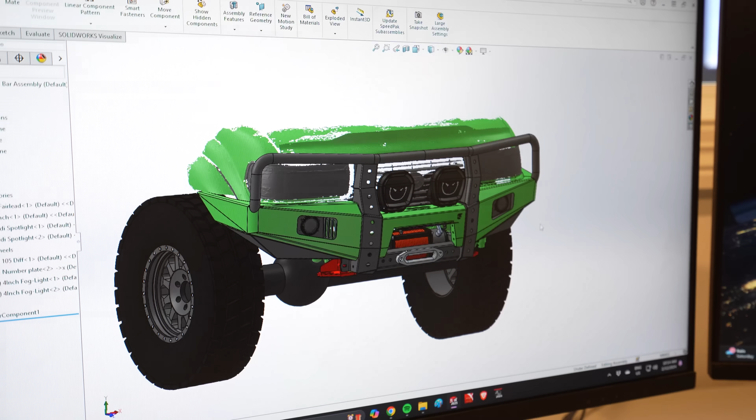All right, so that's all the bar work now on the 80, and you saw us start from essentially CAD, when it was just an idea, to what it is today. Rob, gotta say, you guys have killed it - it looks so freaking good. And the best part is, all this stuff is available right now on your website. So if you're looking for a new bar for your 80, a new rear bar, this whole new generation of Raslarr bar is on there.